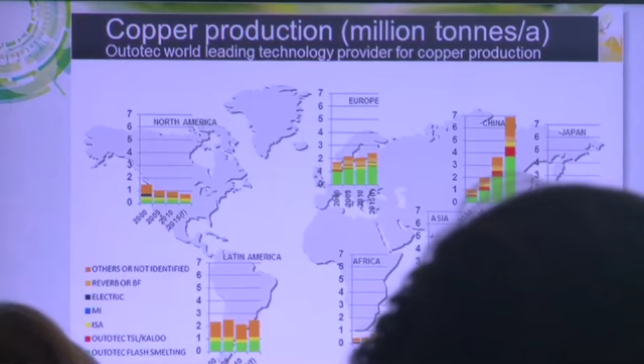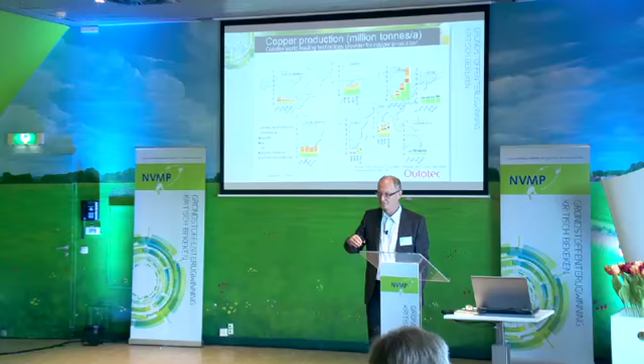The graphs show the growth or decrease of copper production in various places of the globe, but also the fraction of technology used, in this case for copper production from primary sources. If you look specifically at China, what's happened in the last couple of years is quite significant. Interestingly enough, 70% of that copper is produced through Outotec technology at the best available technology level. So it's not a dirty dump anymore. They're doing better than we are.

The other very important takeaway: if you want to recycle, you need some base metal know-how. If you've lost it, it's gone. If you don't know how to separate metals from each other, you can't recycle them back into whatever product you'd like to make. Fortunately, or unfortunately, copper is an extremely important metal to close the e-waste cycle. But not only copper - lead, and the related metals, perhaps zinc, together create a block that's required to capture those metals and bring them back. If you lose that by policy, you can speak about resource efficiency at EU level, but it won't work. Your metals will be recovered at some other place where they know how to do it.

Ultimately, speaking as a metallurgist, we create metals at London Metal Exchange prices, and that has to be profitable for us. We try to minimize the waste as far as we can. That's our business. That's been the business we've been doing for 30 years. There's nothing new to it. So all these nice words of resource efficiency, you can speak them, but you have to walk the talk. You have to make them work. You have to go from your input to your output and minimize the waste, maximize the profit.

TSL is a pot, basically, you can call it a cooking pot. Just get a feel of the scale - you see a person at the bottom left moving around, just to give you an idea of the scale of this type of pot at which you are processing a feed by manipulating the chemistry.

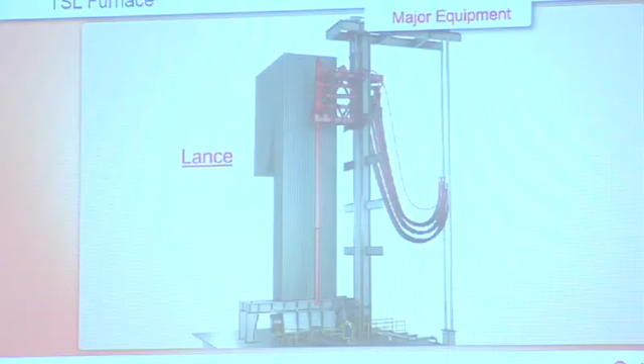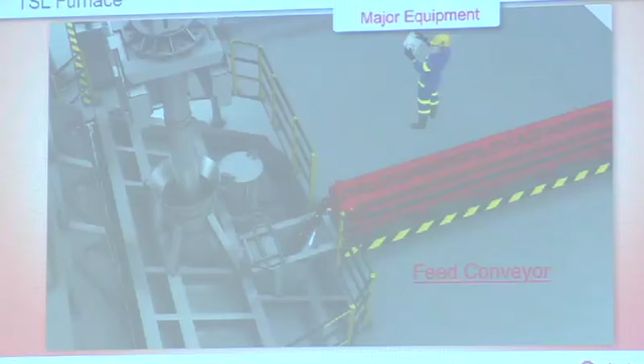This is how deep I will go into thermodynamics today, to manipulate that to recover those materials. In this case, the lance, which is where the word comes from - top submerged lance - it's similar with Umicore, with Aurubis, with Dowa, and other plants as well, to manipulate what happens in the molten bath by injecting fuel and certain gases.

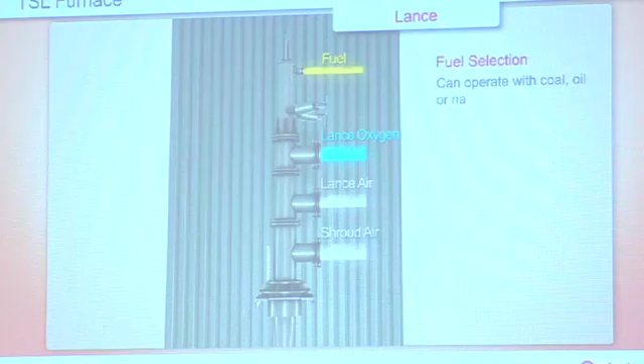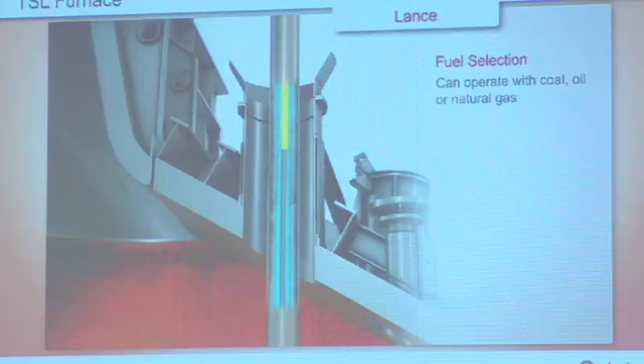And this all happens at temperatures around 1300, even higher - 1350 are processes that we use. Not only can we use primary energy sources, we can also use the recyclates. That's why balancing an e-waste with its scrap plastic and its valuable metal content correctly lets you use them and lower the footprint of your process, so you don't have to shred to infinity.

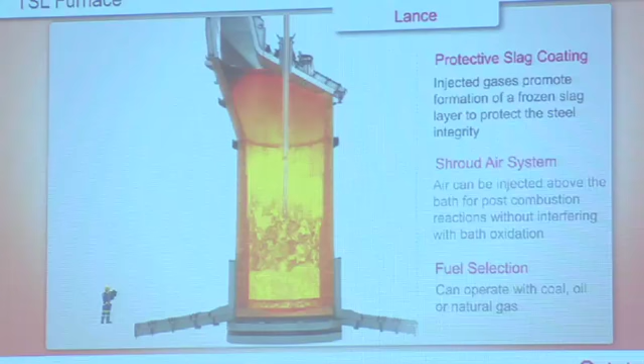By cleverly playing with that whole field from the recycler to the metallurgist, you can achieve a lot. In this case, the real invention was that if you stick a steel pipe into a molten pool of slag - this molten oxide - you may think it will all melt away. But the technology, by freezing slag onto it, protects it, and you get this splashing environment where you can very intensely process a variety of feeds.

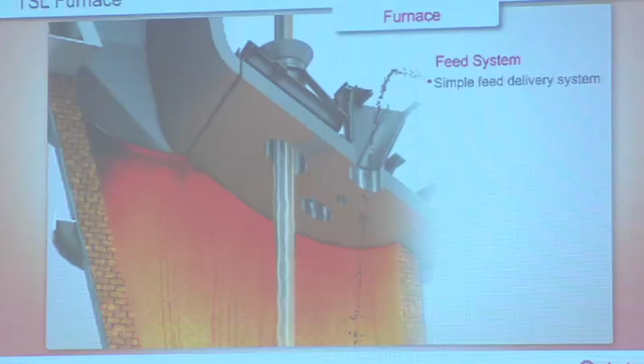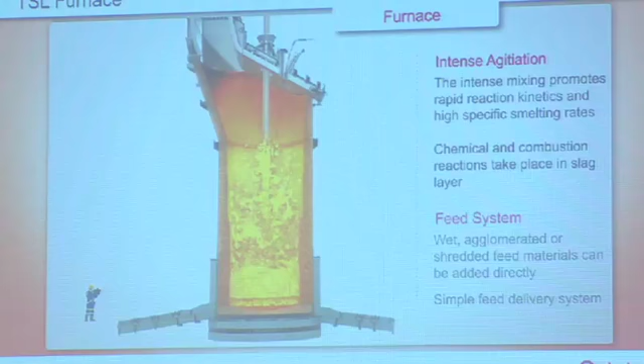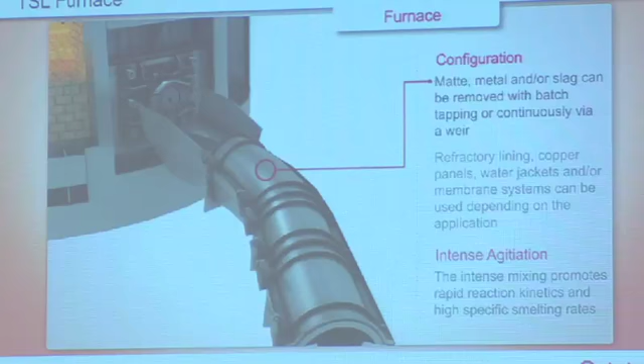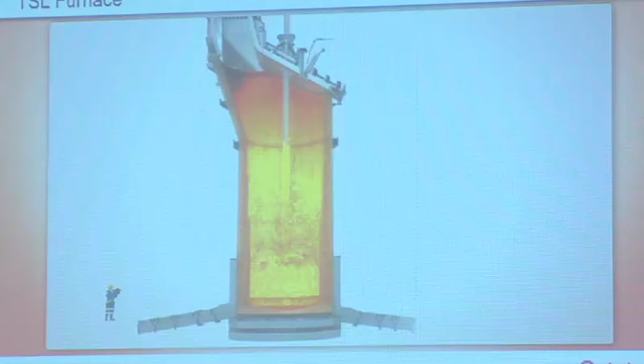And obviously, having this technology, you have to maintain this material which is at high temperature within that vessel. That's the trick - the diameter is about 5 meters on the inner side, and you try to at least make sure that reactor doesn't blow apart. So as you can see, it's a highly dynamic, flexible operation which permits you to go anywhere you like.

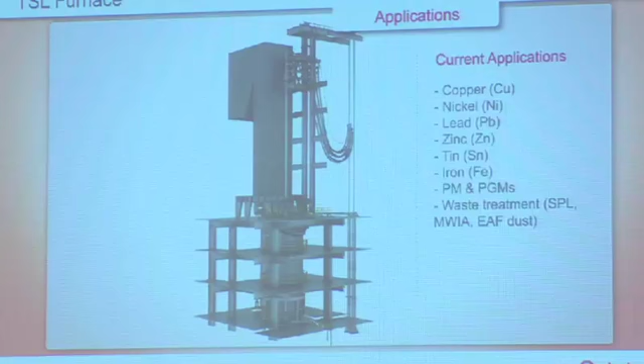For instance, in Namibia we've designed a plant for lead - it's now making copper. That's the true innovation. The true mark of metallurgy is actually to play around in that field to make it work. So that harmony between recycler and metallurgist is of extreme importance.

So just to summarize this, don't go into the detail - with the same reactor we've made lead, as I said, zinc, and all those metals, but we've also made iron. In the same pot, with the same reactor, but with deep knowledge, you can do that. And that's just showing that. Now, I have to show two types of graphs, just to highlight what we have to deal with, and this is a very simple one.

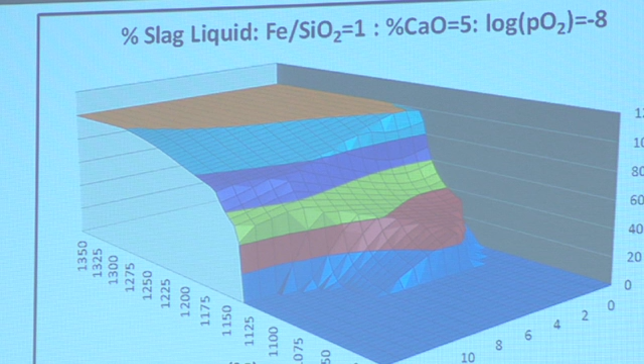So can you put that in a design for recycling rule? No, you can only simulate that, and we can do that - it takes 5 minutes. And then the EU spends 1 million, 2 million of taxpayer money on research, which we can already do. That's very critical as well, but it makes me angry to see that happening.

Then just as a final overview sheet, this sheet just shows what happens with elements. Depending on how you run that furnace, the metallurgy, the depth, you can get different results. You can play around with it. Ultimately, the company wants to make profit. It wants to recover the metals into the right fraction.

But each mixture is different. Each mixture creates other materials that can either volatilize, or go into the metal, or go to the slag, or go wherever. I'm just going to zoom through a few sheets just to give you an idea. That is the trick of metallurgy. That's why people have to talk, to be able to understand this in depth.

Okay, so I come to my last sheet. I promised I would not give you a metallurgy lesson this late in the afternoon. And I'd like to end off - I had a question just over tea time: where can I learn this metallurgy?

Unfortunately, there are less and less good metallurgists around in the EU, and we have to make sure that we maintain that. There are some initiatives that are actually trying to do that. And then I don't mean textbook metallurgy, real metallurgy, to know and understand where things go - just as you had said, understanding how you recycle, where those fractions are going. That's the depth, and you just don't find it anywhere. You have to talk to the right people.